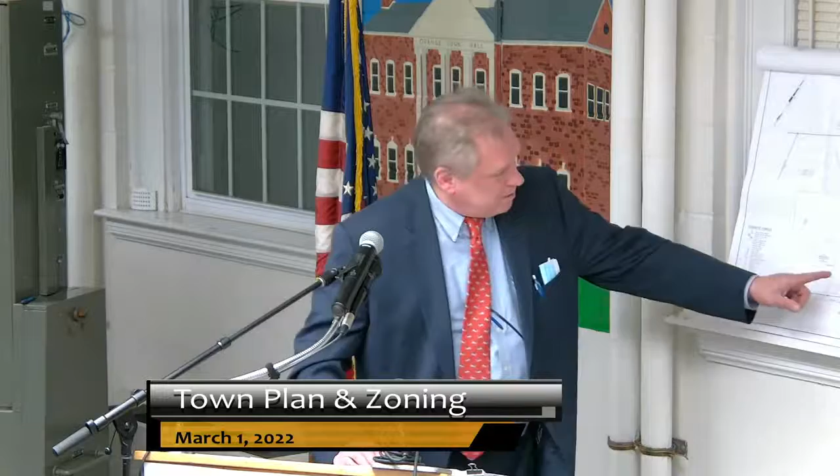Correct. Also, we've got wetlands approval. We're proposing to remove impervious surfaces and replace them with pervious surfaces that would allow better water dissipation and hopefully prevent contaminants from getting into Silverbrook. That's something Inland Wetlands has already reviewed.

The big construction project that was there - we all had to deal with it. There's this huge pipe. They widened the post road there an additional lane, so now it's essentially 5 lanes wide. They put this huge pipe over a new bridge, new culvert, and you can see photographs of what has resulted in Exhibit 10, which has better photographs. This huge pipe is a foot and a half to 2 feet in diameter, with a huge concrete abutment along it.

So that's really what's dividing the post road from Chips. It's not accessible, and certainly a barrier for any oncoming traffic onto the property. It's a fortified wall, but if you flip through that exhibit you'll see different shots of that wall and how imposing it is with the guardrails that run by it. So certainly from a public safety point of view, no car can get into this location - it would be virtually impossible.

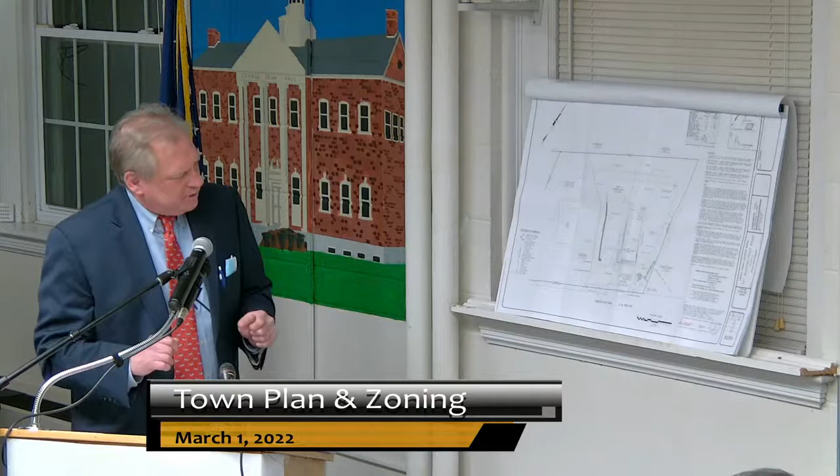So what I learned today was this: Chips building was built in 1966 by Clem Passarello, the father of Ken Passarello, who owns the property with his wife, Georgiana Passarello.

About 20 years ago, the breezeway many of us have been through, which acts as an outside door then an inside door to keep the cold weather out and give people a place to wait, was constructed.

Since then, nothing significant has been done to the outside of the property as far as the restaurant goes. In 1984, the Ken Mike Tower was constructed, with approvals coming sometime in '82 and '83.

There are two buildings on this property, two different uses. But as it turns out, the property has never legally been subdivided. I have the tax cards in the little book I compiled for you.

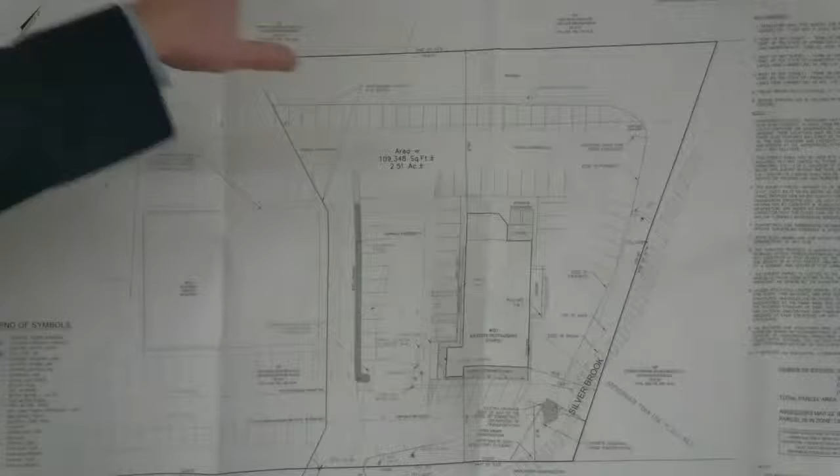The first tax card says 325 in the upper left corner, for the Ken Mike Tower. The second shows 321, for Chips. According to the tax assessor today, this is what's known as a courtesy split. I'm not sure exactly what that means, but that's what he called it. The property is legally one parcel, but has two uses and is taxed as separate parcels.

It's our contention that Chips Family Restaurant always had adequate parking and still does. But if it needed more parking on weekends, it has the benefit of the mixed use it's had for many, many years.

Is the number of spaces non-conforming? No, we believe it's conforming, and Jeff Gordon here is going to explain that for you. That's why I brought him.

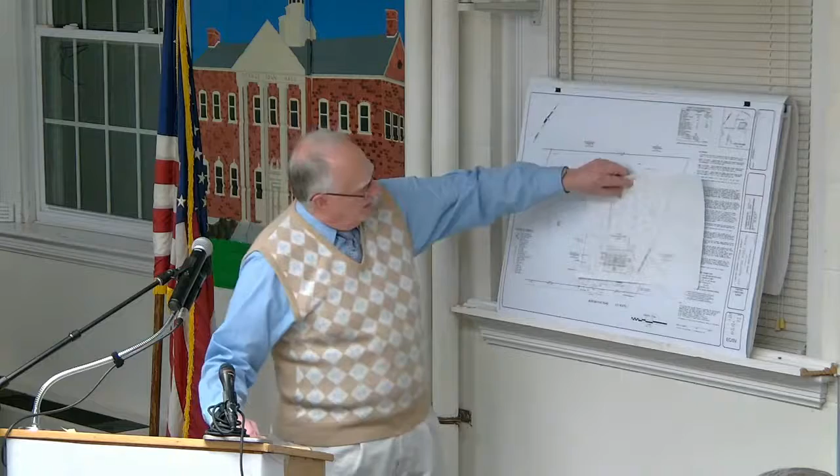That's the thing -- I went through the parking ratios based on what I knew about Ken Mike, based on what the regulations were at the time, when it was 4 per thousand for an office building. And the restaurant, which was interesting -- I have a highlighted red area here. Back at that time, few probably remember, but restaurant parking was calculated based on one space per 75 square feet of patron floor area.

And I think the approved plan showed 32 parking spaces. I tried to polyline through the building, and I came up somewhere around 33 parking spaces. But any way you look at it, a lot of times parking spaces are striped to meet the number, and they don't really meet your standards.

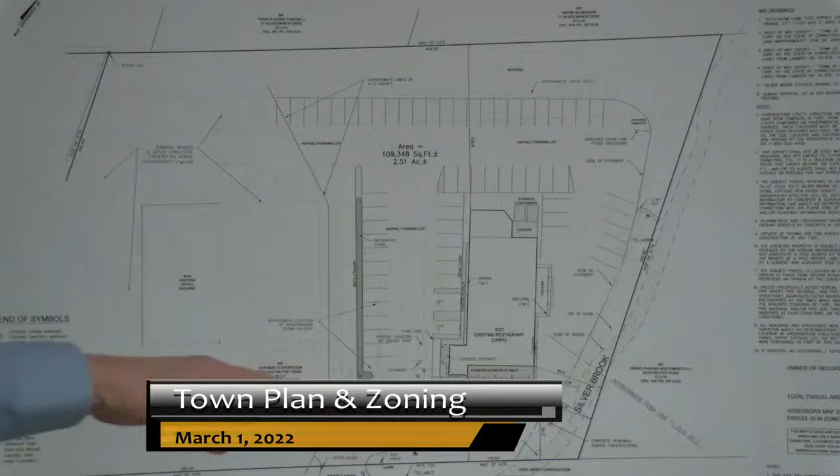As we look, those existing spaces over there, these spaces over here, don't meet any standard that you have or that I'm generally familiar with, but that could be a result of 15 feet of the road disappearing and 15 feet of the property disappearing through time, and it just kept getting squeezed down. So what we tried to do, as we put in this patio area to memorialize what they were doing during the height of the COVID close down, is to restripe spaces and regain the spaces that would be lost here, and make sure they actually are working parking spaces that meet some sort of standard.

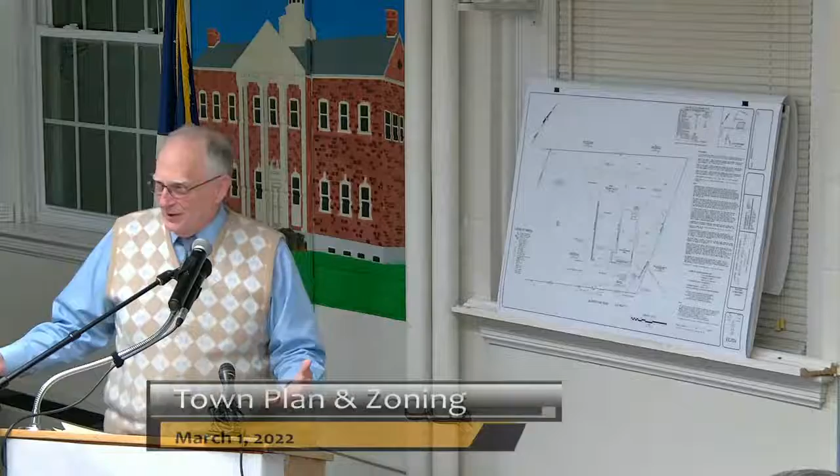So, so I'm clear, if you were to consider this to be two separate parcels, what's the parking requirement? For a restaurant, for chips?

Well, the way I would calculate it is if you took the building at 32, and if I added parking according to the 1 per 75 patron floor area for the patio area, even though that's only seasonal parking, that would be like another 24 or 25 spaces. So I would have a requirement of 57 spaces, say. And right now...

Being that it's not divided into two parcels, it seems like the natural line has always been this island here, and there's 64 parking spaces that are attendant to that. So that's why it's never really been challenged as far as the need for parking. You know, occasionally, if nobody wanted to walk back there, they would park over here when nothing was going on.

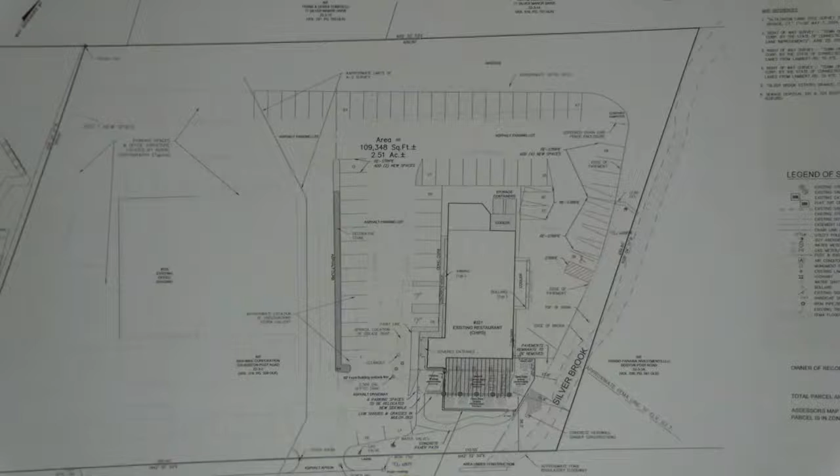But what I did is I was able to pick up 2 parking spaces here, pick up a parking space back there, and I restriped these spaces so they're actually normal-oriented size spaces.

So I just want to make sure I understand your testimony, that in the event it is two parcels, there are 60, how many? Well, it's hard to say two parcels because we don't know where the parcel line would be. You just pointed out- Well, I'm just saying that's a natural, historically, that island seems to have been, but, you know, that would make this non-conforming and this very conforming, in my estimation.

So I don't know, you're not submitting it like that, where the magic line is, but we're not asking for a subdivision today. We're just giving you a little historical outlay on this.

Is there access to the building from the east side? Well, there's pedestrian access, but no, they have to walk around to the front door there, but the staff and whatnot have access through the rear of the building. And then we have- because that's closed off now. That would be closed off under your plan.

Right, and again, you don't want people, there was always that little hesitation when you pulled in here, am I gonna go right or am I gonna go that way? And uncertainty is a real bad thing for traffic. You want a natural flow, and now we just come right in here, and that's fine.

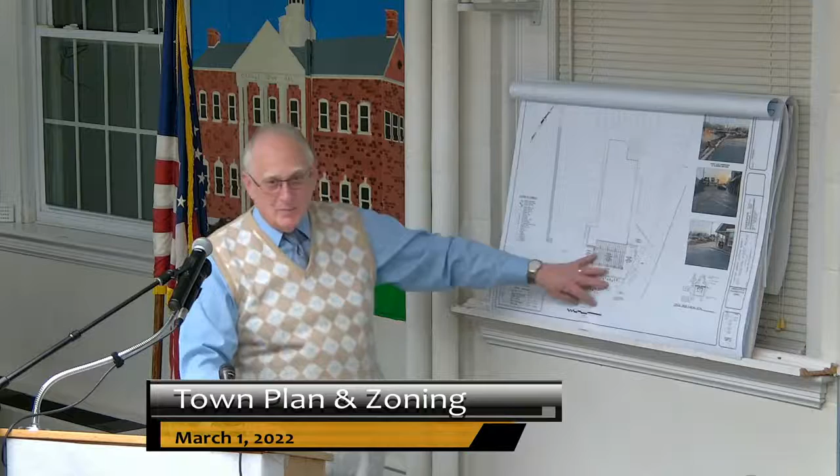Just to simplify my portion here, the landscape design is basically to highlight the time of year when it's going to be used, with ornamental grasses, hydrangeas, liriope, fragrant planting materials, and then plant materials along the edge of the stream to be in harmony with the riverside there.

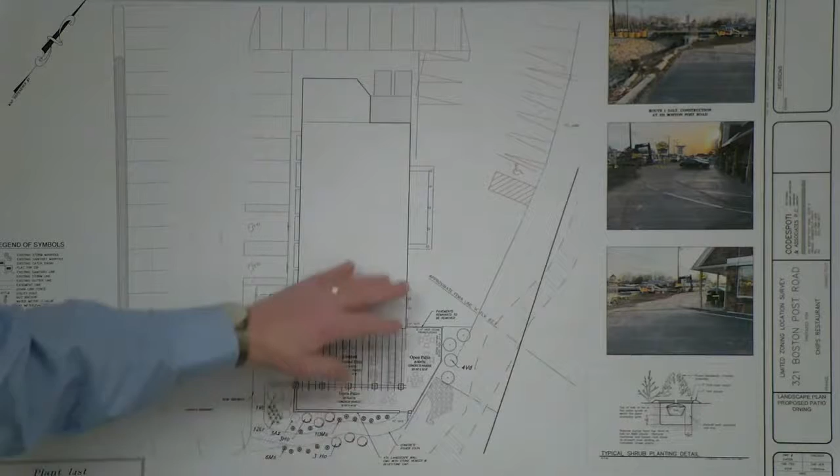How many patrons are you thinking about for the new area? Well, I think John can address that best, because when they sit out here, they have to lose seats inside for access, so there's a net on that.

I see in the application that you have inland wetlands approved. Yes, that was about a month and a half ago, earlier this year. I think there's a typo in the application because I thought it said that permit was obtained in 2020. My question was, is it still in effect? I have the corrected version here - 2022, so that's in full force and effect.

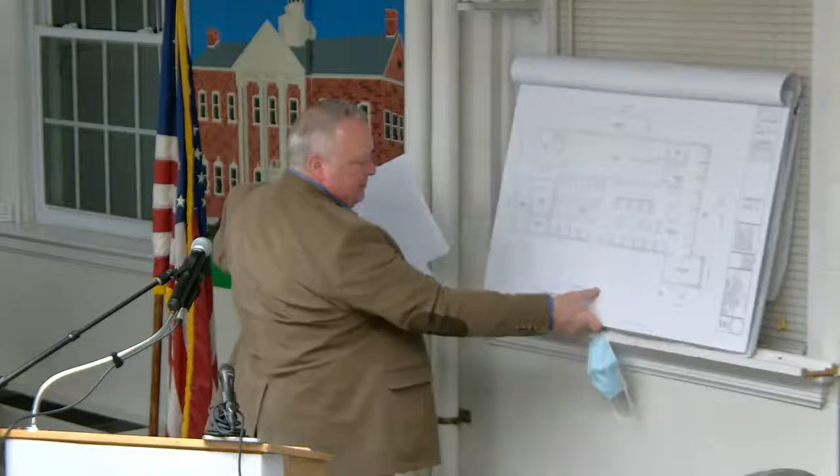Just to touch on the building, the existing is remaining as is, with the exception of some seats being removed, a total of 4. A net of 4 will be removed to accommodate some new glass that you're able to walk through, those sliding doors. The porch remains as is.

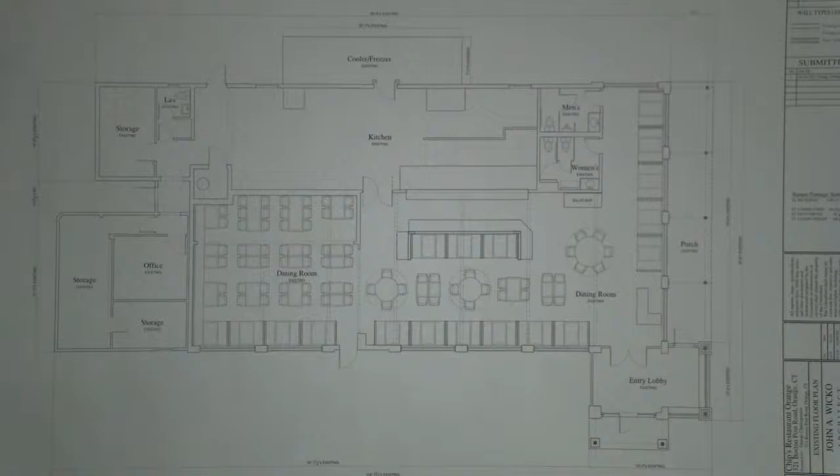We're adding a trellis. Just wanted you to see where the porch is. So that's this here, and then we're adding this trellis, and it's part of the patio, and then there's the open section which has no trellis above it.

John, you access the patio through only the inside? Yeah, the new patio is right next to reception. You can't access it from the parking lot, is what I'm trying to say. Yes, you can - there's an outdoor waiting area, which is kind of being used now, but we're getting in a spot so we can contain some people, so it's a little safer, instead of getting run over.

And then there's also, so that's here also. That will be supervised by the hostess. And then there's this walkway, which Jeff alluded to, which is really part of our egress plan, so there's two ways out from the patio area.

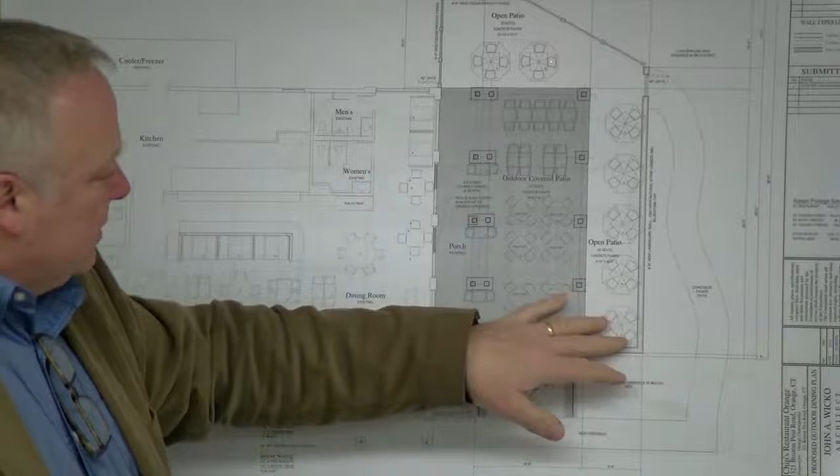The net seats on the outside are 72, they're seasonal. So when this is busy, this isn't busy, and when it's cold out, this is closed and everyone's back inside. And we're proposing a solid wall, kind of a buffer, since the construction is done - a landscape item, basically. A 4-foot fence here and then a 6-foot fence in the back. So it is a contained patio that people can't meander around once they're done eating.

Hey John, what's the setback for the patio? The side or the front, toward the post road? It's 36 - I've got the 30 feet. We've got the tables, all the tables are on the drawings, the inside of the setback. So no, the building is clearly outside of it, but the tables were kind of subject to it, so we decided to pull those back a few feet away from the wall.

I have a drawing, is it on that? If I could establish that line - do you guys have that drawing? I believe you do. I'm sure we do.

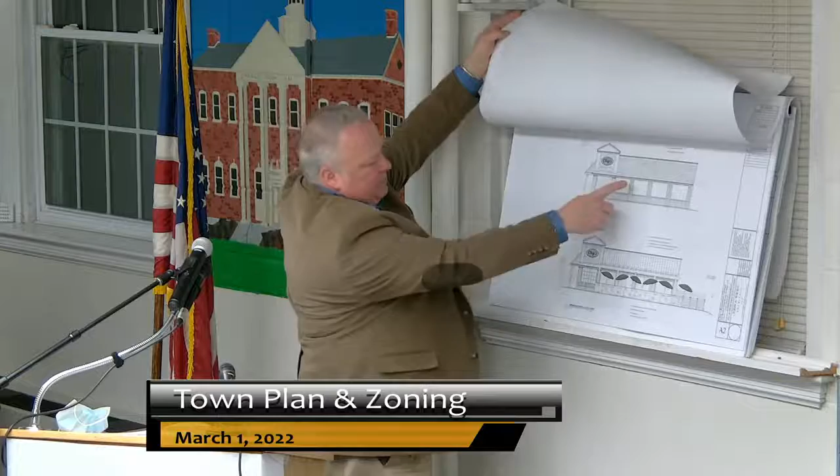Okay, good. And then the exterior looks the same, with the exception of the wall, the fence, and the trellis that's in that area. And I have, the Post Road is here on this. That's correct. And I have some colored renderings if they want to be distributed, to see the natural browns and grays of the stone, and the trellis is going to be natural wood.

These all the same? I think that's just a color rendering of the front, yep, that's what the colored one is.

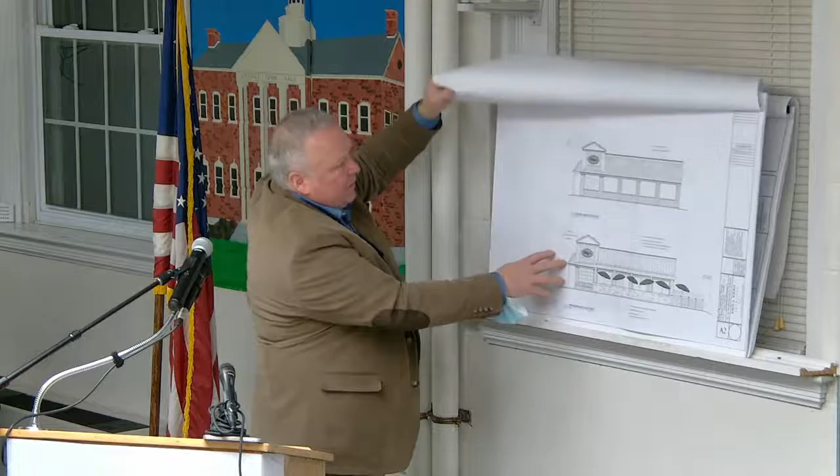So access to the restaurant from the patio is either through those glass doors. Yeah, that's the primary access, on the sliding glass doors. Yeah, there's... these booths are removed, which is on the previous plan. There's tables substituted.

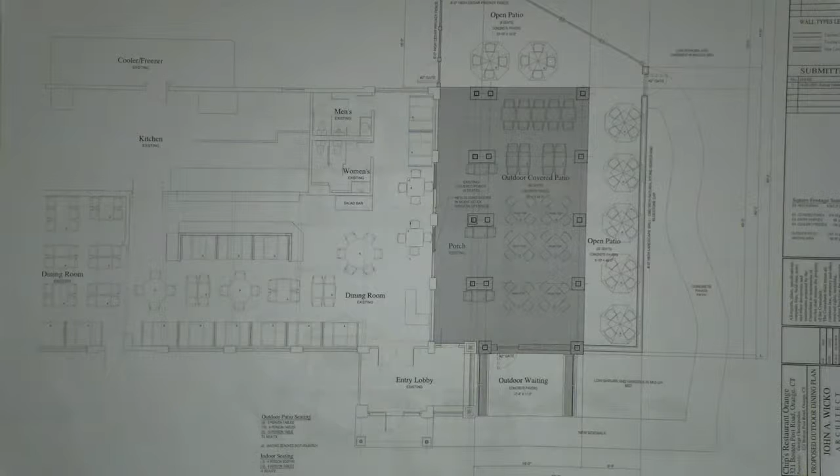These two areas will allow the patrons to come from the hostess counter through into the porch and be seated. But you also said there's access from the parking lot area right there? Yeah, there's an outdoor waiting area, there's benches on either side, and the hostess will be kind of busy. They usually are, that's how they always are out here now, they have to go out and call names and all that, but we're trying to get it in one spot, a little safer. On nice days, they could come in through that door also.

One of our standards prohibits food and/or drink preparation in the outdoor seating area. That's not intended, I assume. Correct, it's all wait staff served. All the preparation is in the same portions of the restaurant as it currently is.

Again, I'm just looking at the special standards here. Do you show a requirement in the plans? I don't think I saw it for anchoring the tables and the umbrellas. The umbrellas are anchored with the pod that they sit in, they're weighted. Tables are under the trellised area. So nothing special? We're not going to bolt the tables down, but they are outdoor tables designed for that purpose. Okay.

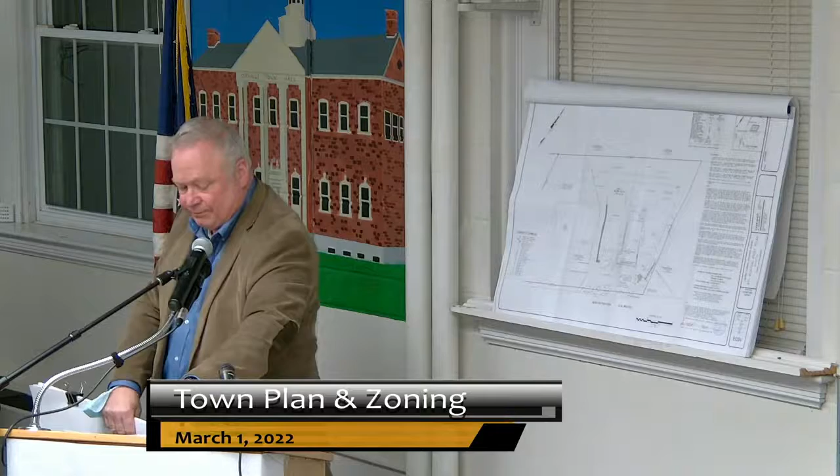Was there any concern about pedestrians walking around the back of the building? Any traffic commission concerns? I was thinking of the question you raised, Tom, on that - what's the candy store? Munson's. And there was a sort of blind turn coming from the back of the building heading out toward the front, and we asked for some signage. It's going to be restricted, so I think it's going to be safer, better than it was, yeah.

But what about the pedestrian traffic? I don't think they can get through. Are they going to be able to get through, Jeff? No. The only way they would get through is through that gate. There's an exit door here for emergency access that they could go out into the parking lot there, but you're not going to really be having anybody going around the building. No vehicles can go around. He's asking about pedestrians, people on foot. Can they walk around the building?

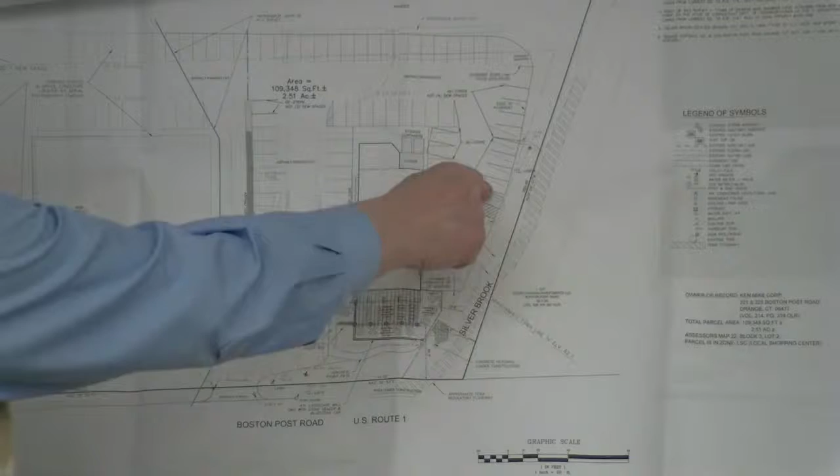They really can't get around here because there's a riprap slope into the stream. I'm talking about from that door, around the back of the building. Well, you could park in one of those spaces, but we expect that's going to mostly be employee parking back there. But if they do, they'll walk through the parking towards the front where they recognize the entrance when they first drive in. You're only going to park here if it's the last spot available, because you'd have to walk all the way around to get in. Not to say it might not happen, but it's not a prime spot, obviously.

You're thinking it's creating a dangerous condition because they could sneak in toward the front door? I was thinking cars are coming in and going right past the building, and people are coming out of those spaces, going toward the front of the parking lot. So nothing like that was raised with the traffic commission? Not to my knowledge. And they signed off? They did.

I mean, I think you can make that argument in any parking lot. Right, yeah, I guess. Yeah, I'm thinking about Target or any of the other ones, you know. Eli's is a good one. Right, yep, same thing. Yeah, Eli's is very similar. All right, haven't lost anybody there.

What about the fire department? Fire department signed off? Yes sir. The rest of the department heads did as well. All right. That was my initial concern, actually, the lack of fire department access all the way around the building, but they didn't have it to begin with. Right, on that side, right. I beat you to it, Kevin.

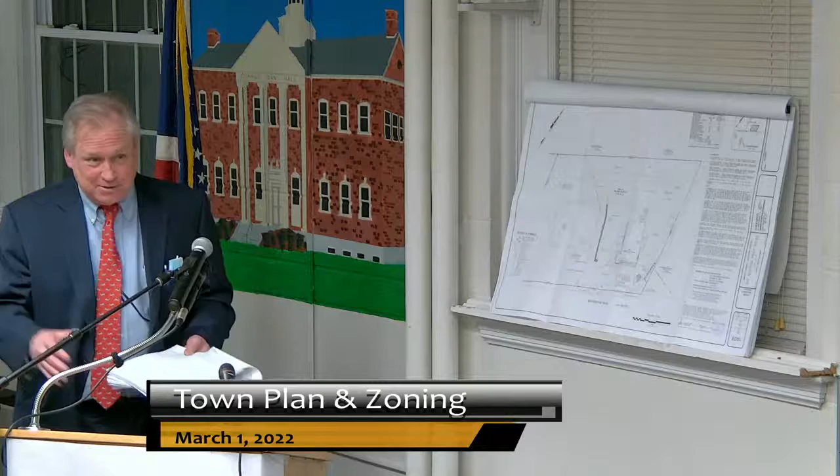Okay, anything further? I think I can give you my usual conclusion about how we comply with all your standards and will comply with your standards, but I think you've already heard all of that. So we will comply with your standards, and I believe we do. Thank you very much for your time. All right, thank you. Thank you.

All right, is there anyone in the audience who wishes to speak regarding the application? Okay, no. Do we have anything further? Do we think we need more information from municipal department heads or anyone else in order to decide the application?

For me, there's not enough evidence that this is two separate parcels. I don't think anything's been presented here that shows me that, and if it's not, then we're going to take it on one parcel, and that's how we'll deal with the submission.

I think we should close the public hearing first, and have our discussion. Is someone prepared to move that we close the public hearing? So moved. Second, by Commissioner Smith. All those in favor signify by saying aye. Aye. The public hearing is closed.

No, I think 383-175 comes in to solve that problem for us. As long as you agree that language fits the bill, this is almost the perfect situation.

It's the exact situation you would hope for in this kind of multi-use scenario, where you have one building that's used during one time of the day, the other portion used at a different time of day, and the parking accessible has not been a problem.